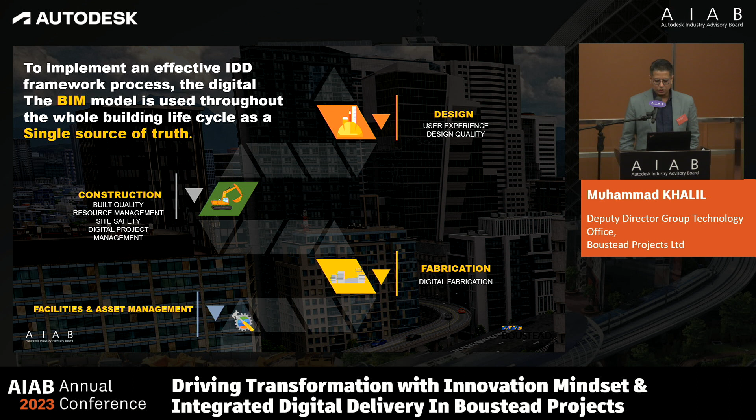In the Singapore context, we talk about integrated digital delivery, where the digital model or building information model forms the base of the collaborative process. So we start off with design, digital construction, digital fabrication, and digital facilities and asset management.

In terms of our project implementation, I will share how we use the digital model, how we collaborate effectively and intensively with different digital discipline models, and how we use the cloud to exchange information with Autodesk Construction Cloud and mixed reality, to get approval for design through a collaborative process between the consultant, client, and most of our subcontractors.

AI verification and drones, I'll share some of our journey and stories, how we do this and the experience we've gone through, including digital project management and how we use lean construction methodology.

You have heard a lot in Hong Kong about MIC, modular construction. Similarly in Singapore, we have DFMA, design for fabrication and manufacturing assembly. So we also have fabrication—how do we then track some of this using a digital model?

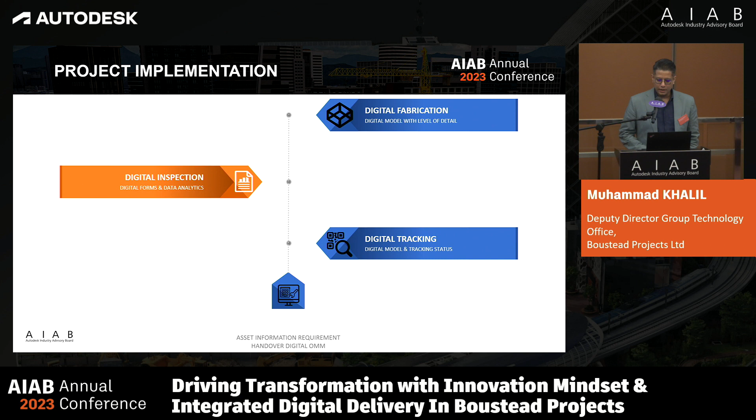For inspection forms, we have a lot of reports and a lot of inspections being done on the ground. How do we digitize this whole process? And obviously, tracking of all these processes and equipment on site.

I start off with building information model, or digital model—I will use these two words interchangeably. First, we use it to identify critical phases.

Earlier on, we had a rendering session talking about Twinmotion and Revit. In the case of Boustead Project today, we use multiple platforms, not only Revit—there are also other 4D sequencing software or platforms that we use to increase our productivity, value engineering, and enhance coordination across multiple stakeholders.

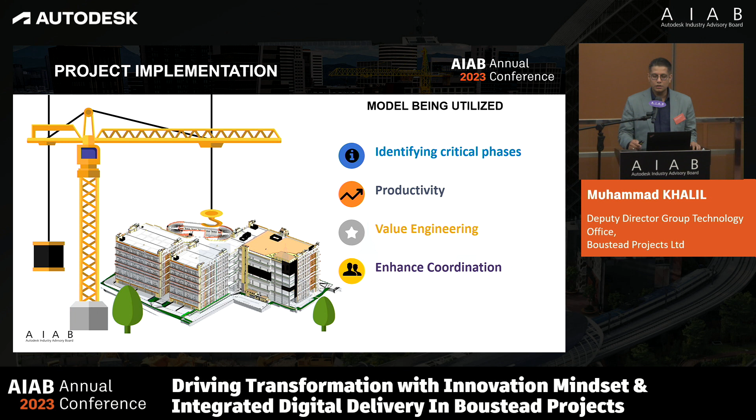So a quick example of installation sequence. Earlier on, we mentioned this is not CGI for good visual quality, but rather our installation sequence, done for pre-construction and post-construction planning.

So after we are awarded, we use it to update the construction sequence, allowing us to collaborate effectively with multiple stakeholders.

These are sample videos—actual videos we use to prepare for our tender presentations to prospective clients, to show them exactly what's critical: the timeline. If you can see below, there's a timeline showing the date and day of exactly when we are constructing, giving assurance to the prospective client on how we can build according to the proposed timeline.

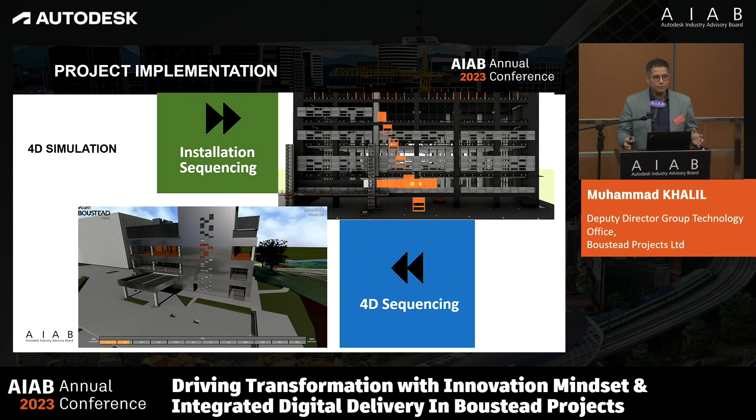And obviously, you have heard a lot about virtual simulation—we also use it for site safety. In Singapore, this is a major concern at this point in time. After COVID restrictions were lifted, there were a lot of incidents and cases of workers getting into safety incidents, with a higher risk of fatalities.

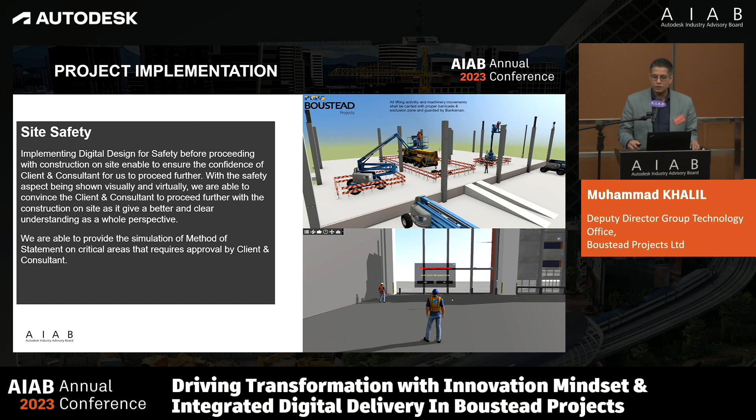So how do we prevent this? What we did was create a virtual simulation that allows safety workers to better articulate and visualize the safety risks that will be undertaken during the construction or installation process.

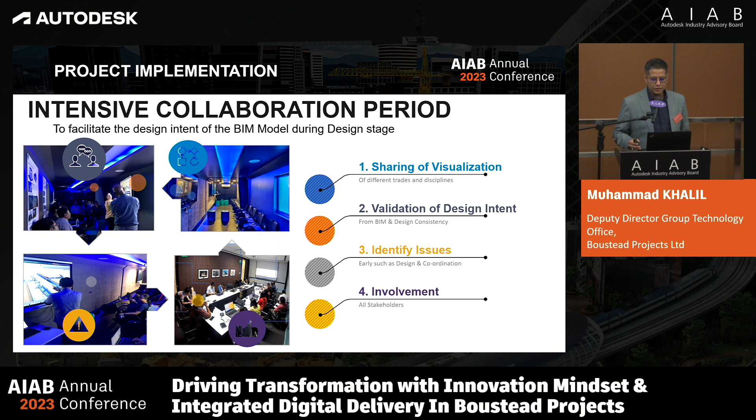This is a term from Stanford University, part of the VDC, Virtual Design and Construction, what we term as ICP session, Intensive Collaboration Period, ICP. So what we do during this stage, the moment we are awarded a contract, the building information model or digital model will be used to validate design intent, identify issues early, and get the involvement of all major stakeholders, including the consultants, contractors, and some trade specialists coming in early.

And then we have Integrated Concurrent Engineering, ICE, where we identify issues throughout the whole construction timeline. So what we have experienced from this process is that we have become more collaborative. With the use of building information model, we are able to visualize better, design and coordinate better, and our decision making is done in a much more constructive and productive manner.

So in this case, it's not just the contractor alone. The consultants, the architects, the structural engineers, the MEP consultants are involved. Not only the contractor, but also downstream our subcontractors are involved in this ICE session, and it takes place weekly or bi-weekly.

Most of our projects are on a quick timeline where we are given 20 months on average to complete. So this ICE session will take place intensively during the first 2-3 months of the project to identify any major coordination issues early, so that we do not have to do any rework when we start construction on site.

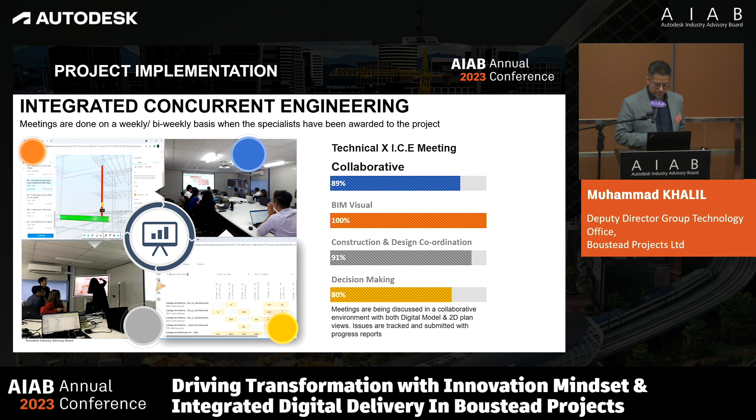Obviously we need to have what we term our common data environment, but now we have started to term it a connected data environment where we connect with various platforms.

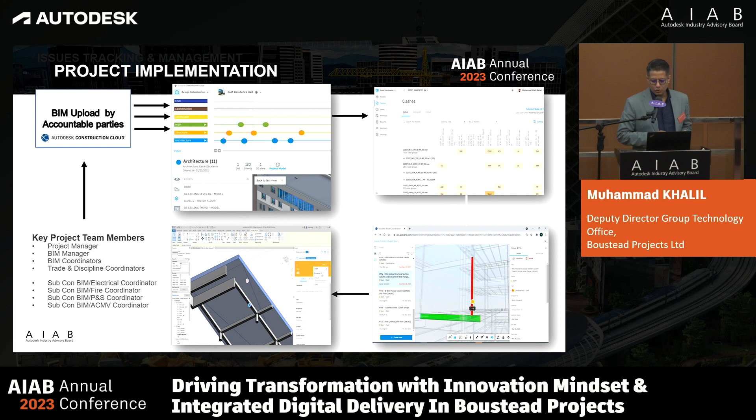So this is in terms of our project implementation, how we use ACC. Different project key members and team members are involved in this whole process. So there's a lot of accountability, where most of these issues, earlier I mentioned the 2 work processes - one is ICP, Intensive Collaboration Period, and then ICE, Integrated Concurrent Engineering - are uploaded or handled in this same common data environment or connected data environment.

In terms of digitalization of our inspection process, previously we had 5 steps. We walk the site, take notes manually, capture images using our mobile phone, then upload the files and create the form manually via Excel, PowerPoint, or Word. There could even be a template involved.

But now we have digitized that whole process so it becomes 3 simple steps - walk the site using your mobile phone, and the digital forms are created using our mobile platform. We started this whole initiative back in 2017, and it helps our QA/QC become much more accountable, as response time from various stakeholders is also becoming faster and faster.

So again, there's a lot of digital tracking involved for accountability. If not, most of the time we'd spend arguing about whose defect this is and who is the stakeholder or owner of these defects on site.

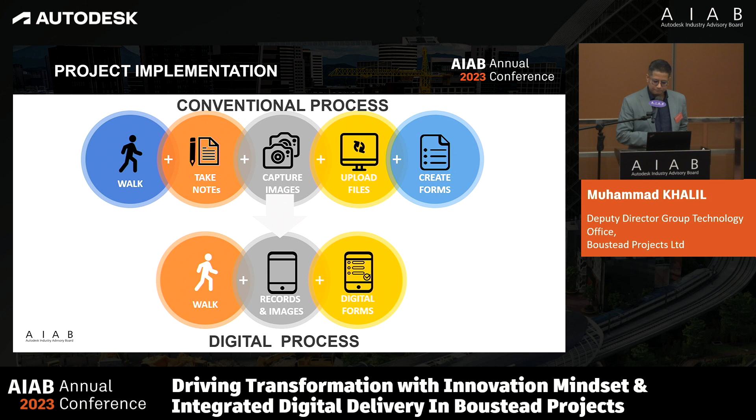Again, going back to common data environment or connected data environment, today we have implemented this in about 3 to 4 projects in Singapore, which helps our project managers in terms of reporting. Conventionally, traditionally, they collected information, data, or pictures from various sources, such as project engineers giving them images of construction progress, or updates on certain RFI or approval processes.

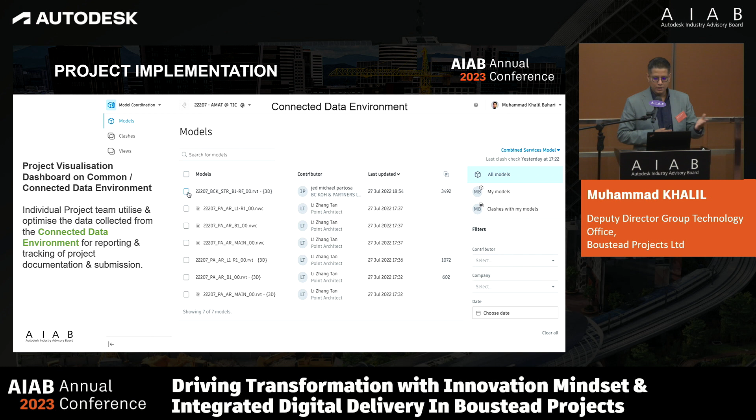But today, with a connected data environment or common data environment, they do not have to go through that process, because the moment they log in, they are able to articulate and do the report via this whole platform. So we can see who is uploading the model at different times and what causes some of these issues. We are able to track some of these project statuses.

Again, in the Boustead project today, we understand that we have collected various data, and most of this data is quite siloed, so what we are trying to do is consolidate them.

But before we talk about consolidation, we also try to make sure that most of our colleagues and project team members in the organization understand what data-driven insights is. We heard a lot of things about data, big data, but today, given that most of the data are collected on a digital platform, how then do we use it to communicate, collaborate, and coordinate better, and make decisions faster within the organization.

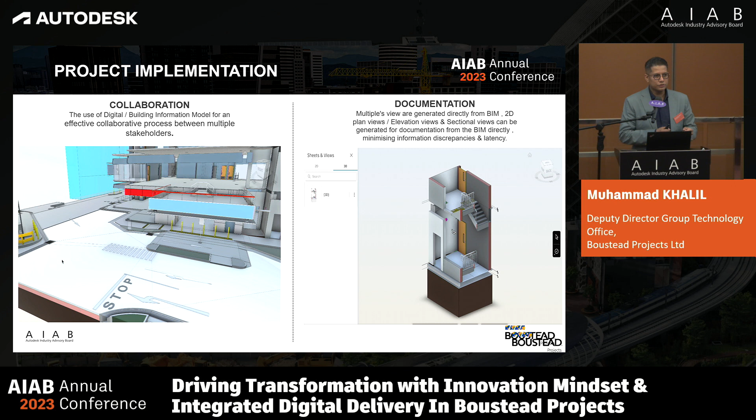Now let's look at a sample of how we collaborate online via cloud. This is the Autodesk Construction Cloud. Today it can be Autodesk Construction Cloud or any other platform. But what I'm trying to say here is that a lot of companies have this mindset or misconception that whenever they want to implement building information modeling, a lot of money is going to be involved in terms of cost, because they spend the bulk of the implementation budget on buying licenses. Instead, if you have a common data environment like this, you do not need to buy a huge number of licenses, because you are able to, what I term, democratize that whole process.

If I'm the BIM manager today, I would need to access the Revit model, but do I need to model? No. If I'm the project manager, do I need to model? No. So do I need the Revit software? No. What do I need to do? I need to review, I need to coordinate, I need to comment, and this is where you can do it online.

So via a platform like this, it allows you to collaborate effectively. It allows you to manage the cost of your building information model implementation, because one of the key misconceptions is that it's going to cost you a huge sum of money by giving additional Revit or BIM authoring software licenses to stakeholders such as project managers and site engineers.

And obviously we talk about documentation. One of the issues we face in Singapore context, I'm not sure whether in Hong Kong you guys face that too, is there are two types of files from various sources: one is AutoCAD .dwg files and the other is Revit .rvt files.

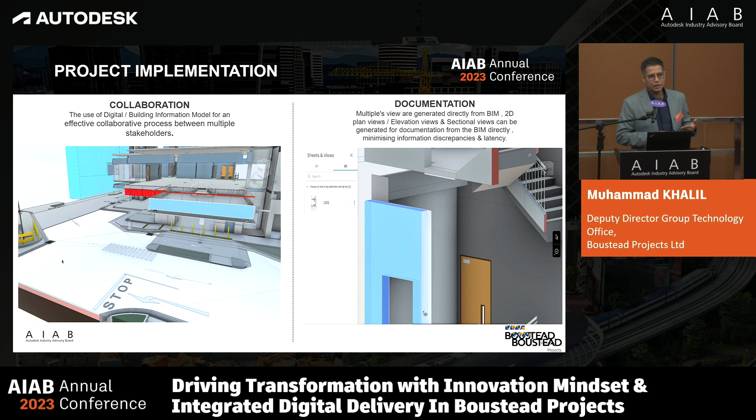But today, as we explained earlier, we talk about a single source of truth. Most of the view sheets come from the building information model, where views such as elevation and section are generated directly from the model. This helps minimize latency and discrepancy within the project itself. So with the Autodesk Construction Cloud platform today, or any cloud platform, you are able to view this sheet directly from the platform, and you are able to communicate and collaborate effectively.

In terms of reality capture, just a simple use case here: we completed this late last year, 2022. It was a simple A&A job given to us by one of the MNCs in Singapore, where they had a process plant and wanted to do addition and alteration to the space. But unfortunately, although they had as-built drawings, those drawings were never accurate. A lot of the time, even in Singapore context, I'm not sure about Hong Kong, as-built drawings are never truly as-built, it was more as-designed, I guess.

So what we did was use LiDAR scanning to identify what was actually constructed and built. Using the point cloud files, we were able to build up a building information model, and they were able to use this model to start collaborating, coordinating, and doing space coordination for their new space for the process plant.

It took us about a month to achieve this, including the scanning process. In case you're wondering why it took so long, you must understand this is an operational space, meaning they are already in use. People are working there, so we need time for them to be out of action, not operational, before we start scanning. Then half of the time is taken to develop the building information model from the point cloud files.

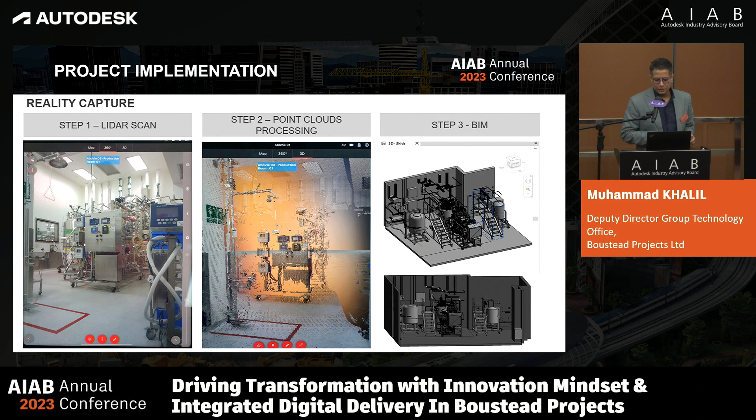So this is the 3-step process that we did with regards to reality capture. In this case, what we did was LiDAR scanning. It's also a request, so what's interesting here...

In 2020, we were in the thick of the COVID action. We experienced lockdown, even in Singapore—I think it was global. What happened was one of our clients said they do not have an overview of the construction site. We were in the midst of completing this project, so they asked how they could have an overview of the construction site without going down to the site or the field.

So we deployed a 360 photo camera and gave them the link. They were able to view all the construction progress at the comfort of their seats without leaving their home—meaning they could look at the 360 photos of the construction site via their laptops or mobile phones, without needing to go down to site.

In case you're not aware, in Singapore when we have a site visit, there will be at least 10 to 20 people walking down the site. Now, because of COVID, we wanted to minimize that, and it wasn't allowed also because of the safe distancing measures implemented. So how do we assure the clients that work is still ongoing, and how do they view this from the comfort of their home or offices? That's what we did.

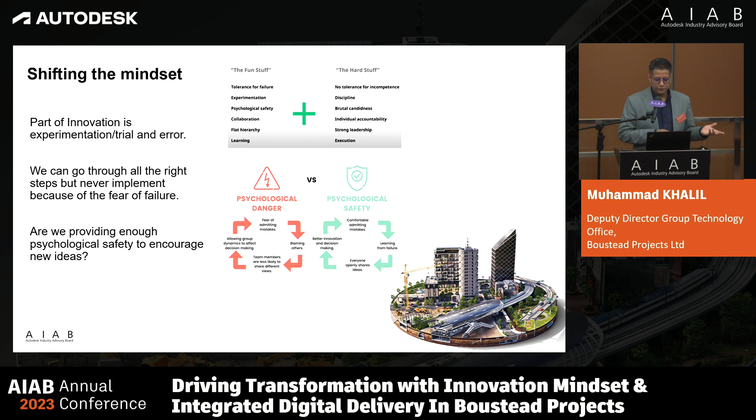These are some of the works ongoing. Part of the innovation is being experimental—there can never be bad ideas, everything is a good idea. So we try to identify some of these good ideas and shift the mindset, creating that psychological safety net within the organization, within the project team.

With that, I'd like to end my presentation, and I'll always end with this question to the audience: will we be digital by default in our built environment industry?